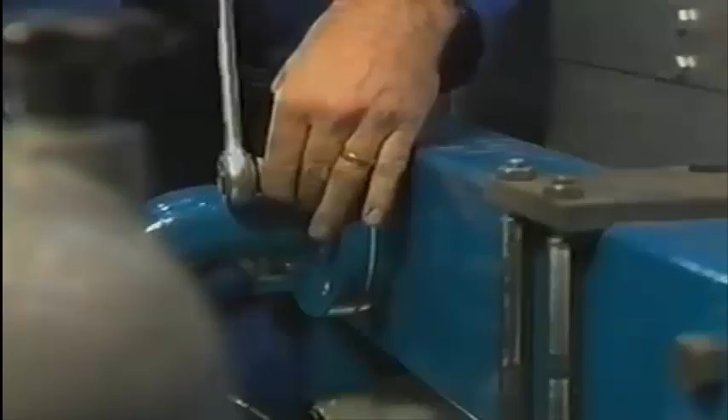Start by dismantling the cooling water discharge pipe before removing the cylinder head cover. This is in order to prevent a mixture of the draining water with lubricating oil. Subsequently, remove the cylinder head cover.

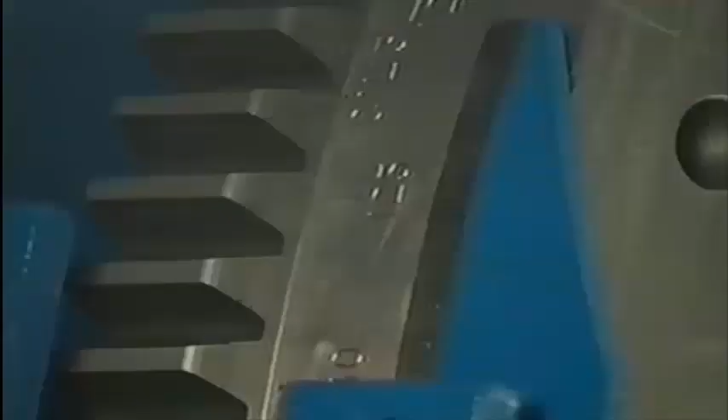Turn the cylinder in question in top dead center combustion and check if the push rods are loose. Disconnect the plug of the exhaust valve temperature monitoring system. Now carefully remove the thermocouple of the exhaust temperature system. Take care not to distort the thermocouple while pulling it out.

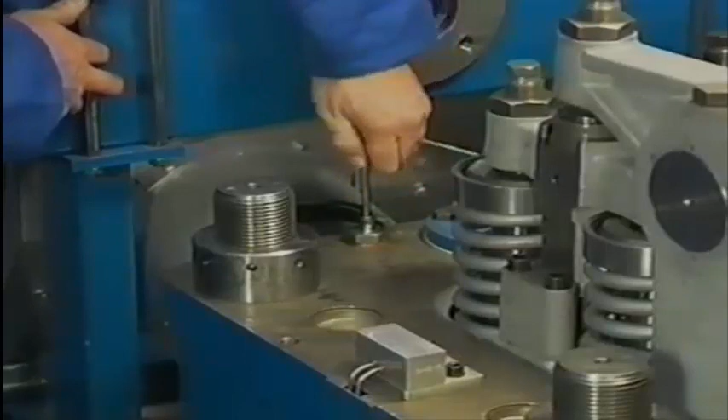In order to remove the upper half of the clamping ring of the exhaust gas piping, 4 socket head screws have to be loosened and removed. Next to the connection of the exhaust piping, the inlet air bend is located. Here, only 4 bolts have to be removed. We continue with dismantling at the operating side of the engine.

Begin with removing the high-pressure fuel line. First, remove the fuel drain pipe of the high-pressure fuel line. After that, unscrew the union nuts from the pump and the injector.

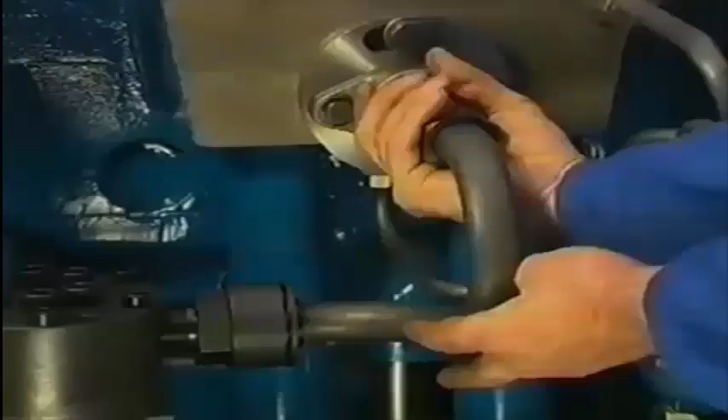Now remove the remaining pipes to and from the cylinder head. First, the fuel leakage pipe. Second, the main lube oil supply pipe. And third, the pilot air pipe. Immediately after removal of these pipes, all openings should be covered.

Before placing the hydraulic stretching tools, make sure that the screw thread of the cylinder head studs are undamaged and clean. Connect the hydraulic stretching tools with the pump by means of the high-pressure hoses. Only 2 jacks are connected because the other 2 jacks are linked up. After connecting the hoses, check if the jacks are in bottom position. Then, the jacks are turned back 1 turn.

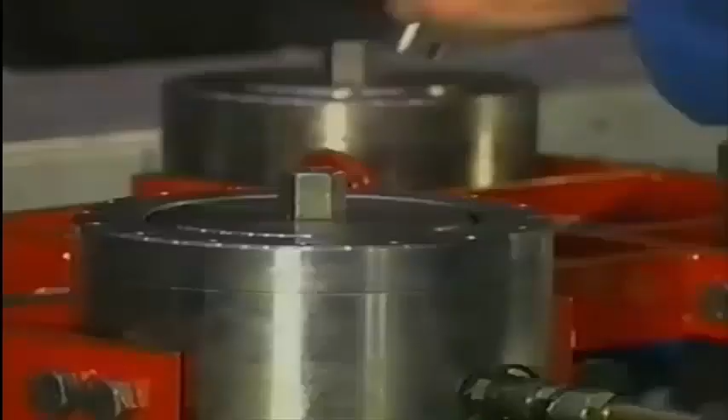Close the return valve on the pump. Set the prescribed hydraulic pressure as specified in the instruction manual by means of the reducing valve. The read-off value on the air pressure gauge indicates 10% more pressure than the real value read off on the oil pressure gauge. This has been done for safety reasons.

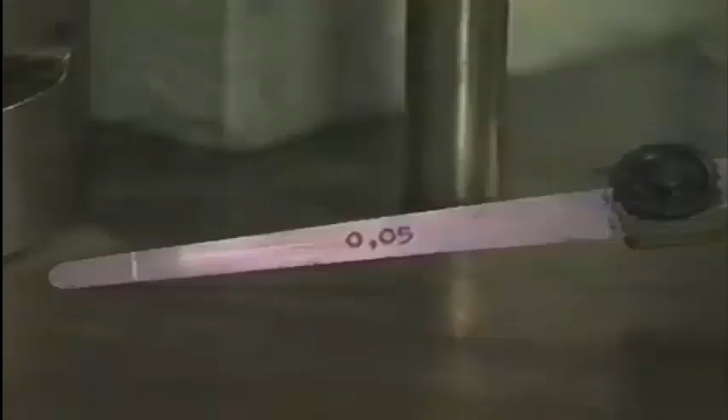Start the hydraulic pump by opening the air supply valve. At the same time, check at what pressure the nuts come loose. Turn back the nuts with a special pin and lower the hydraulic pressure. In case it is not possible to turn the nuts when the prescribed pressure has been reached, one needs to check with a feeler gauge if the nut is free from the surface. Disconnect the hoses, remove the jacks from the studs and check if the nuts are loose.

In order to prevent damaging of the removed cylinder head nuts, it is recommended to turn them on the studs of the nearest cylinder head. Subsequently, place the special lifting tool. For this purpose, 3 M16 threaded holes are provided in the cylinder head. Lift the cylinder head a bit so that the possible leaking water will flow to the outside of the cylinder liner.

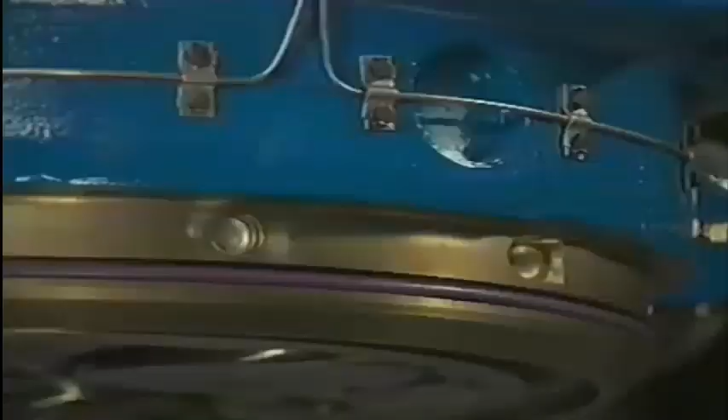Pull the push rod protecting pipes out of the cylinder head, in case they stick inside. Check if the starting air connecting pipe stays in its place. Hold both the push rods until the cylinder head has been completely removed. This is in order to avoid possible damage. Take away the O-ring and place the distance ring. This protecting ring prevents the gas sealing face from damaging when the cylinder head is placed directly on the floor.

Remove both the push rods and the protecting pipes. Close the openings in the engine block to prevent dirt entering the camshaft space. Finally, remove the gas sealing ring and cover the cylinder liner.

These are the special tools required for disassembly and assembly of the piston with connecting rod. All these tools come standard with the engine. To prevent carbon build-up on the piston crown, the cylinder liner accommodates an anti-polishing ring. Remove this ring before pulling out the piston. To do so, use a tripod extractor which can be fitted in 3 special grooves of the anti-polishing ring.

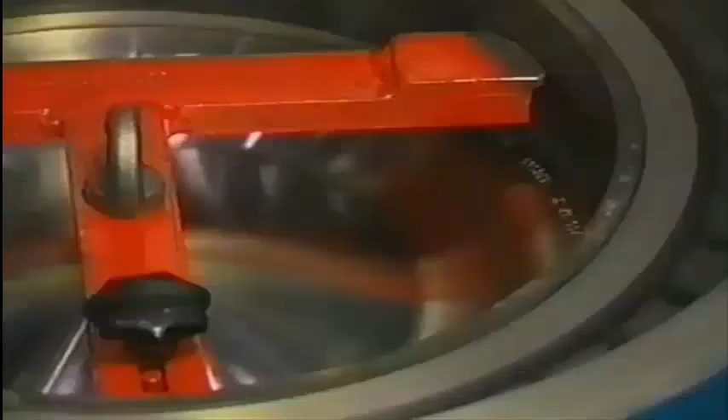First, try to tap the ring out of the liner using a plastic hammer. If the ring is stuck, it can be pressed out gently by turning the piston to the top dead center. When the piston is in the top dead center, the ring can be removed from the liner. Tap the 2 M16 threaded holes so that the lifting tool can be fitted. The cylinder liner must be free from carbon to protect the piston rings during removal of the piston.

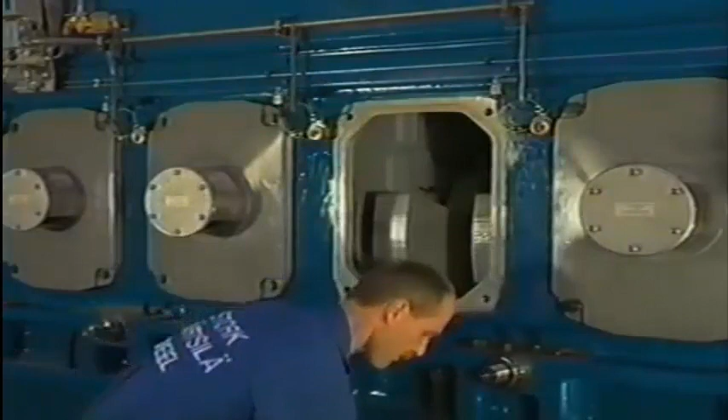When the lifting tool has been provided, the piston can be turned to the bottom dead centre. Remove on both sides of the engine the crankcase doors. Fit the jacks on either side of the connecting rod foot when the piston has reached the bottom dead centre.

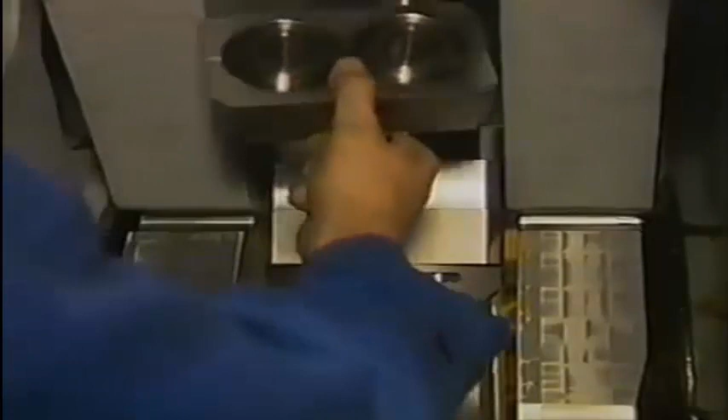To allow all 4 studs to be stretched simultaneously, 3 superposed jacking elements, so-called triple jacks, are used, which jointly provide the required tensile force. Note, the distance piece is provided with a pin groove at the front. Two nuts are used to secure the 3 triple jacks. Each jacking element comes with a separate coupling for oil supply hoses.

When the hoses have been connected to the pneumatic pump, tighten the nuts with the hook spanner to prevent the jacks reaching their maximum stroke. Loosen the pulling pieces 3/4 of a turn using an Allen key to prevent the connecting rod nuts from getting stuck when they are loosened. Loosen the knurled jack nuts 3/4 of a turn from the bottom position.

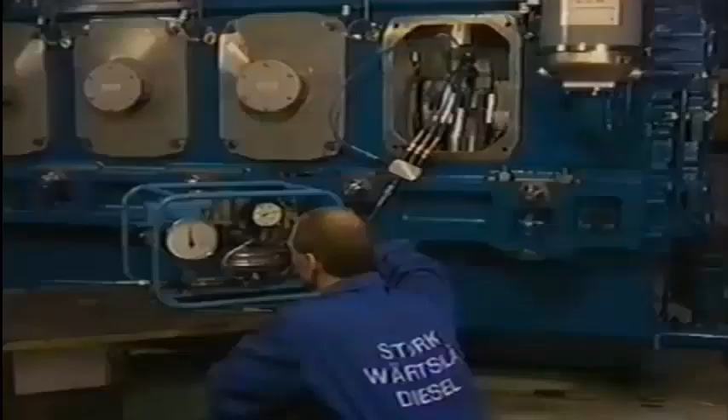Now gradually pressurize the jacks using the pneumatic pump. When doing so, check the moment at which the nuts come loose and then slack off the nut as specified. Slowly open the return valve of the pump to release the pressure in the jacks. Check that the nuts stay loose. Remove the jacks and the connecting rod nuts.

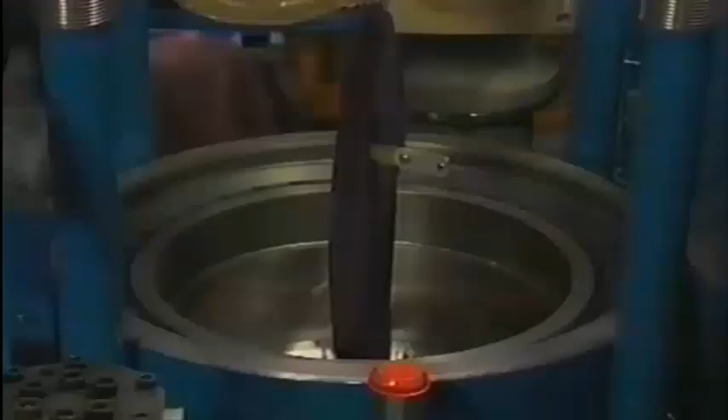The piston with connecting rod can now be lifted from the bearing caps. Fit a plastic protecting plate to the bottom of the connecting rod foot to prevent the cylinder liner from being damaged, and do this before the end penetrates the cylinder liner. Now the piston with connecting rod can be lifted out of the cylinder liner.

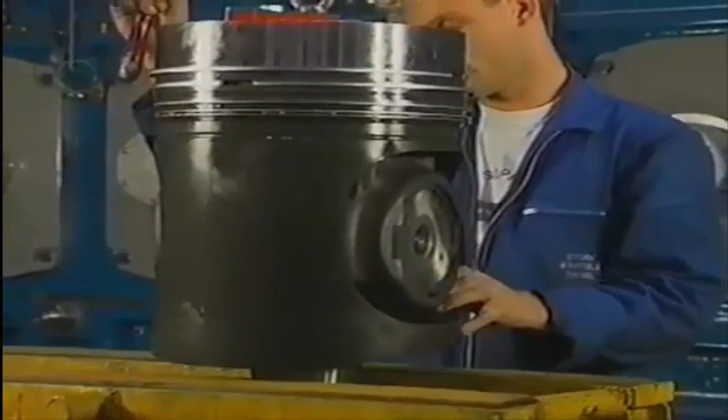Place the piston on a piston pedestal, with the piston pressure side supported on a flat wooden base. Finally, remove the intermediate plate from the big end bearing block. Seal the lube oil supply ducts in the bearing block and secure fixing tools to the bearing caps if turning is required.

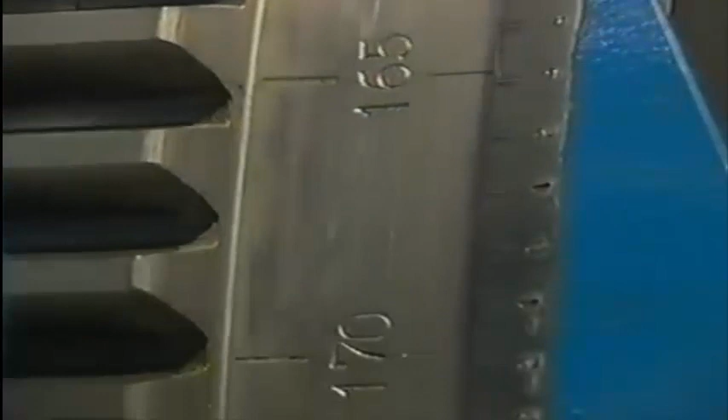Here's a look at the necessary special tools needed for dismantling and mounting the big end bearing caps. All of these tools are delivered standard with the engine. Turn the crank of the particular cylinder in bottom dead center position. This is the best position to place hydraulic jacks. Now turn the bearing cap upside down until the stud bolt nuts point vertically upwards.

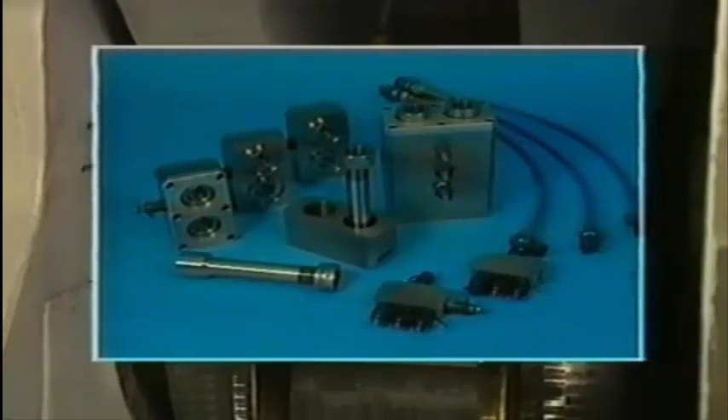Then place both the jacks on the stud bolts at the same time, so that the weight of the jacks is divided uniformly and the caps remain in balance. Since all 4 of the stud bolts have to be stretched simultaneously, 3 jack elements are used, so that together they deliver the tensile force needed. Note, this distance piece is provided with the pin groove at the side.

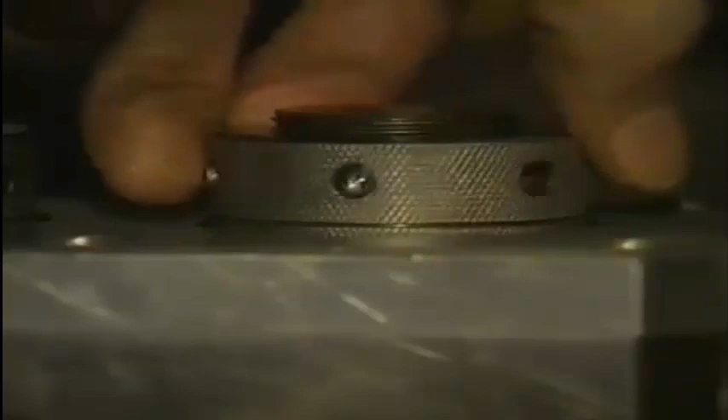Every jack element has a separate coupling for oil supply. As soon as the jacks are connected to the hydraulic pump, the nuts of the jacks are turned tight with a hook spanner. This is in order to prevent the jack reaching its maximum stroke. Then turn back the 4 nuts half a turn. Bring the jacks under the right pressure with the pneumatic pump.

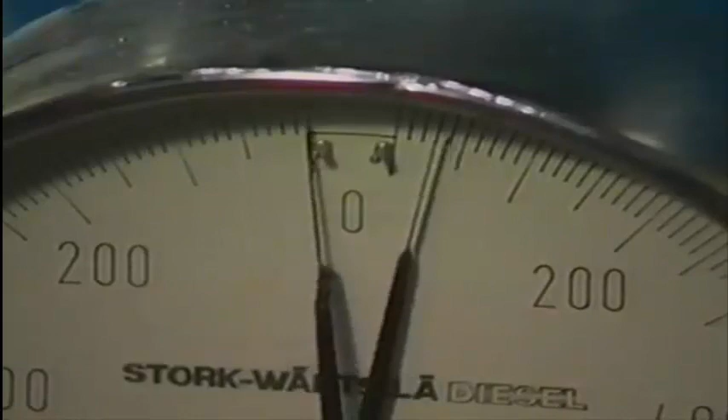Check at which pressure the nuts come loose and turn back the nuts sufficiently. Subsequently lower the pressure to 50 bar and check if the nuts are free. When they are, release the pressure completely. Remove the jacks and turn the relevant crank in top dead center position. When turning, be sure that the bolts of the bearing block point downward to prevent them from getting stuck in the engine block.

To place the slide, the bearing block has to rotate 90 degrees around the shaft so that the nuts from the lower bearing cap point to the exhaust side of the engine. Subsequently fix the slide to the purpose-fitted supports on both sides of the engine block. The supports take care of the positioning and securing of the slide. Now turn the crank carefully 60 degrees through top dead center towards the exhaust side. Place at camshaft side the carrier under the upper bearing cap.

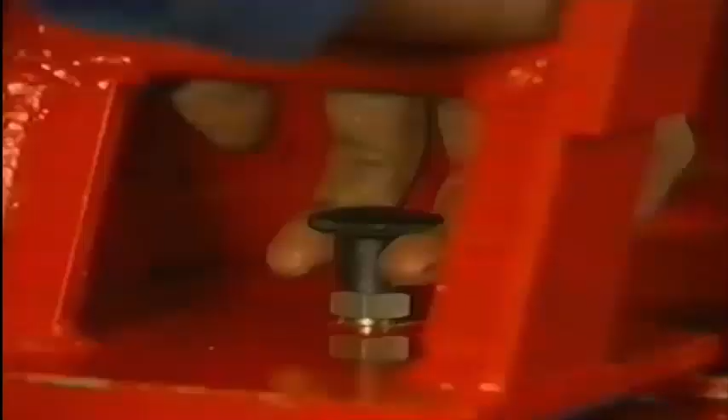Connect it with the 2 nuts to the bearing cap. Now first remove at exhaust side the 2 lower nuts of the bearing cap in such a way that the second carrier can be mounted. Pull up the blocking pin when the carriers are moved inside.

Fasten the carrier of the lower bearing cap by turning on the blocking pin in the locating hole at one side of the cap. During mounting of these carriers, it is possible and sometimes necessary to turn the crankshaft a little bit. Always do this with the manual control of the turning gear device.

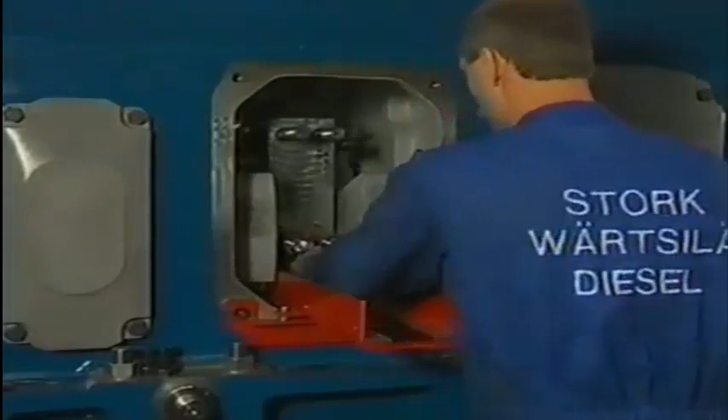When also the upper nuts have been removed, both the bearing caps can be pulled out. The bearing shells can be removed from the bearing caps by hand. Wrap up the shaft with a piece of rubber for protection and closing of the lubrication oil channels in the crankshaft.

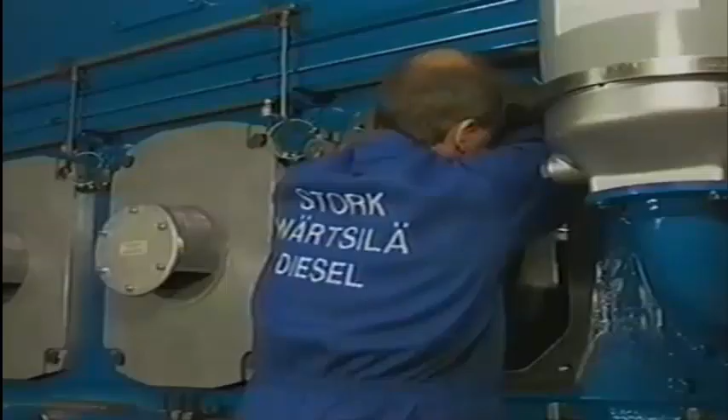The crank pin bearings can also be inspected without removing the cylinder head and the piston. The piston will be blocked then by means of 2 supports. These are the aluminium supports with matching fastening bolts. They are both placed through the crankcase door and mounted at the bottom side of the cylinder liner with the delivered bolts. To do so, the piston has to be placed in top position.

Subsequently, remove the already loosened nuts of the connecting rod foot. After that, turn the crank to the bottom dead center position. Now the piston with connecting rod will rest on both supports and the bearing caps will come free from the connecting rod foot. When the crank is in bottom dead center, the big end bearing caps can be dismantled in accordance with the preceding procedure. Mounting has to be done in reversed order.

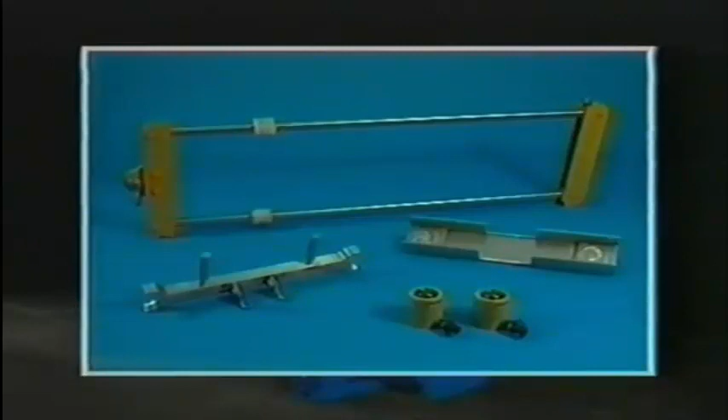Here are shown the special tools needed for the cylinder liner: lifting gear, positioning clip, bridge piece and jacks. These tools come standard with the engine. Before the cylinder liner can be removed, 3 temperature sensors must be taken out from the liner. Be sure not to bend the sensor when taking it out.

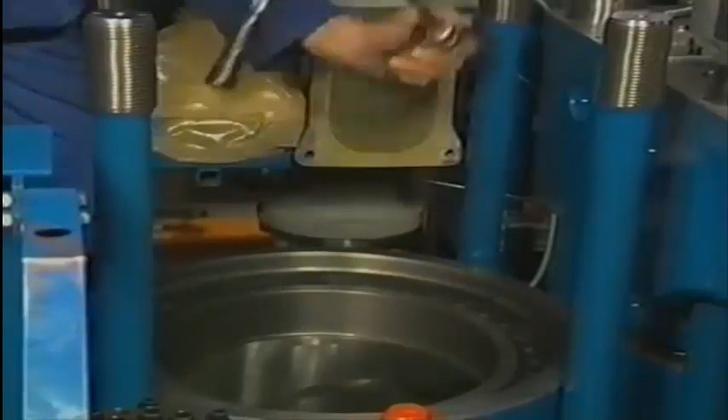Now remove the 2 cylinder liner clamp pieces which prevent the liner from being lifted when the cylinder head or piston is being removed. Now place the hoisting tool in the cylinder liner in transverse direction of the engine. Make sure that the tool is perfectly centered in the liner.

To detach the cylinder liner from the joint faces, loosen it with 2 jacks. Turn the crank of the relevant cylinder to the bottom position so that the counterweights are located straight under the cylinder liner. The bridge piece and jacks are placed on top of both counterweights.

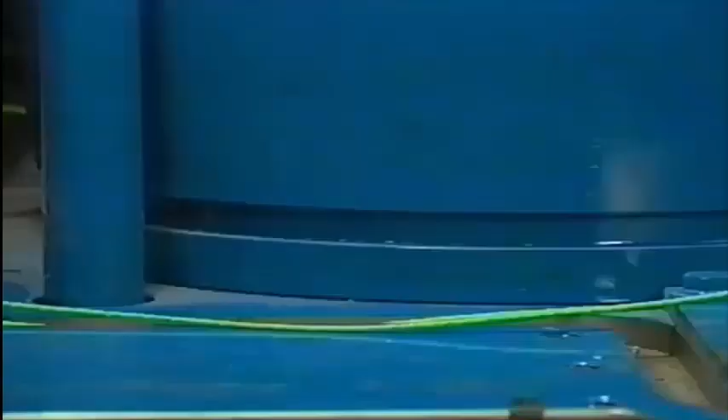Connect the jacks to the hydraulic pump and pressurize the jacks to push the liner out. Gradually increase the hydraulic pressure by turning down the air pressure reducing valve on the pump. When the liner is loose from the sealing surface, it can be lifted out of the engine.

Now clean the sealing face of the cylinder liner well and check it for any damage. If necessary, the sealing face can be slightly lapped with a lapping ring. Finally, remove both O-rings from the cylinder liner and clean the grooves if necessary.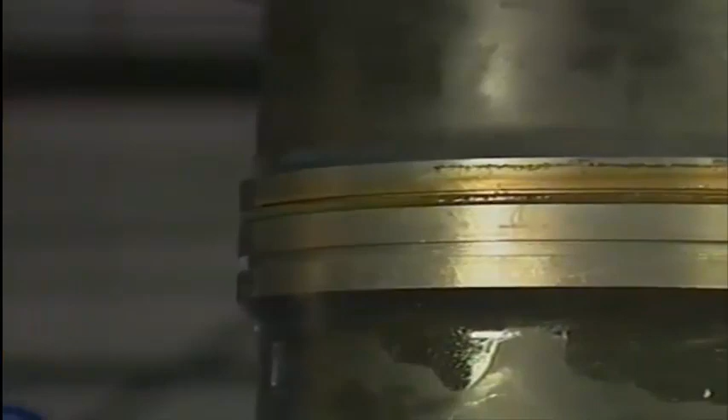This is a look at the tools required for disassembly and assembly of the main bearing. All these tools come standard with the engine. Never remove 2 main bearings mounted side by side at the same time. First, loosen both side studs. Standard, 1 jack for this purpose is available. If 2 jacks are delivered, then simultaneously mount the jacks on both side studs of the relevant main bearing.

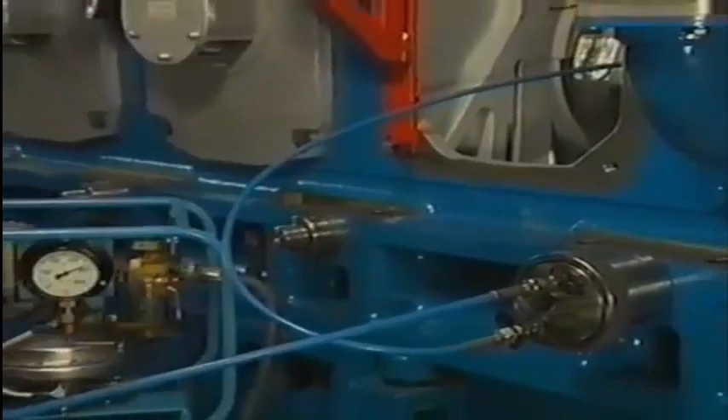Connect the hydraulic hoses and then first tighten the jack as far as possible. Then slack off the jack 1 full turn. The jacks are so designed that they can be connected in series. Set the prescribed hydraulic pressure using the air pressure reducing valve on the pump and pressurize the jacks as required simultaneously. Note down at which pressure the nuts come loose. The prescribed procedure is stated in the instruction manual. Remove the nuts on either side.

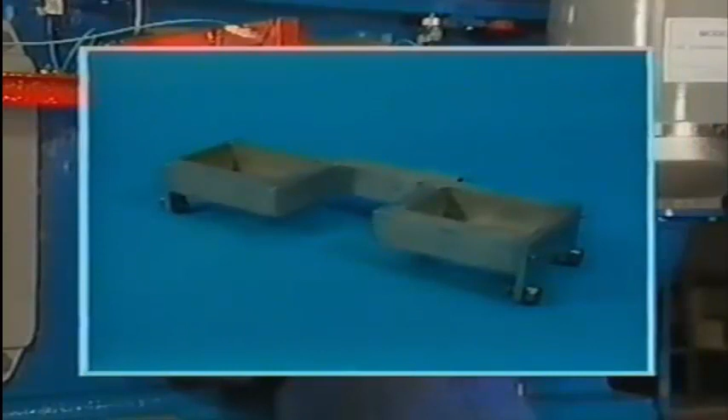The engine is equipped with a bearing monitoring device. A sensor is fitted on each main bearing cap. The sensor can be detached by disconnecting the banjo union. This must be done before the main bearing cap is loosened by jacking. A trolley placed on the rails in the oil sump is used to position the jacks of the main bearing cap under the studs.

Place the long stroke jack in the trolley with the rotary disc pointing upwards. Now the main bearing jack can be placed on the rotary disc using the jack hoist mounted at the side of the engine block.

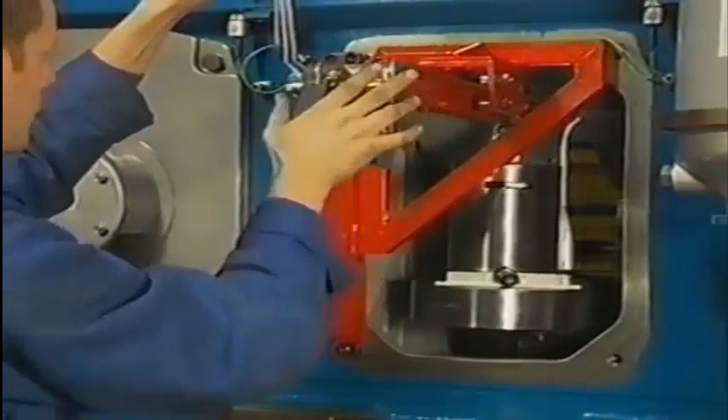In this way, the jack can be easily moved until it is straight under the stud of the main bearing cap. Then couple the long stroke jack to a hand pump to lift up the main bearing jack. This is done to allow the jack to be screwed on the stud thread in an easy way.

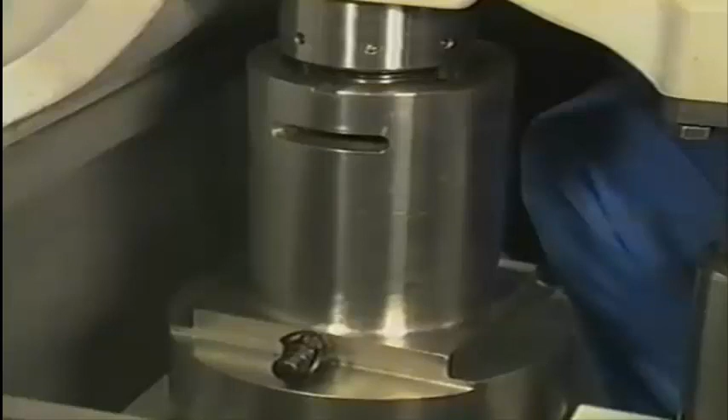Now turn up the jack until it contacts the main bearing cap. Repeat this procedure for the second jack. Loosen off the jacks one turn. Connect the jacks to the pneumatic pump.

Pressurize both jacks as specified in the instruction manual and simultaneously check when the nuts come loose. Slack off the nuts of the main bearing studs one full turn. When the nuts are loose, the long stroke jack is raised to take up the main bearing jack when it becomes free from the stud.

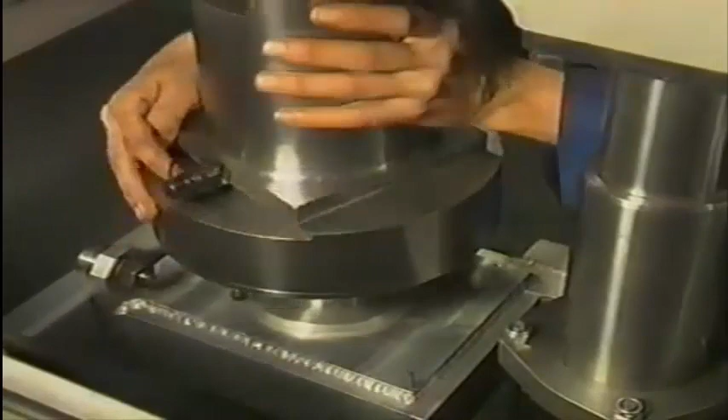Now drop the oil pressure, which makes the jack go down as well and can be lifted from the crankcase using the jack hoist.

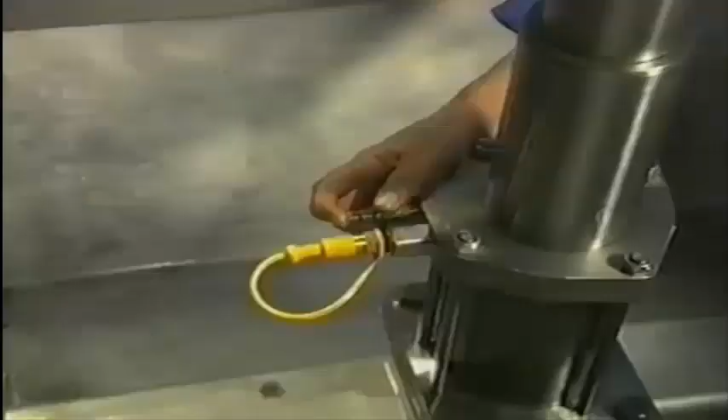Mount the hydraulic couplings on the low-pressure telescopic jack under the main bearing cap, which also serves as the main lube oil supply line when the engine is in operation. There are two connections on the telescopic jack which are marked up and down.

Connect the delivery side of the hand pump to the down connection, black hose, and the oil discharge hose, blue, to the up connection. Keep the valve in the return oil line closed. Pressurize the telescopic jack slightly so that first both side studs can be removed.

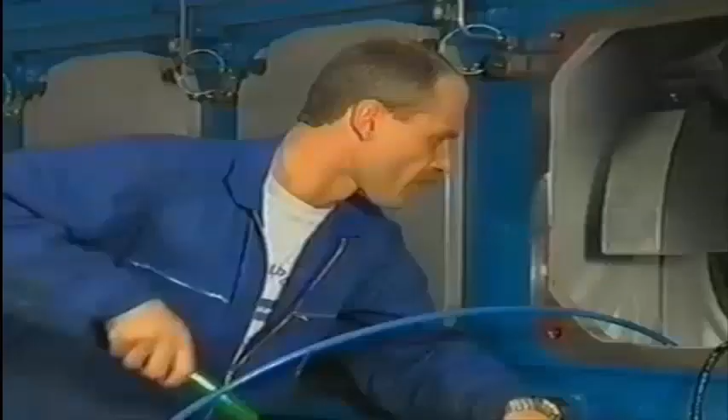Now remove the two main bearing cap nuts. Keep the return valve on the pump closed. Next, the return valve on the pump can be opened, after which the bearing cap can be forced down in a controlled manner.

When the telescopic jack has reached its second stage, the cap will be lowered by its own weight. When the cap is in its bottommost position, the lower bearing shell can be taken out manually. Disassemble the upper bearing shell using a turning plate. This plate is placed in the lube oil duct of the crankshaft and secured with an Allen key.

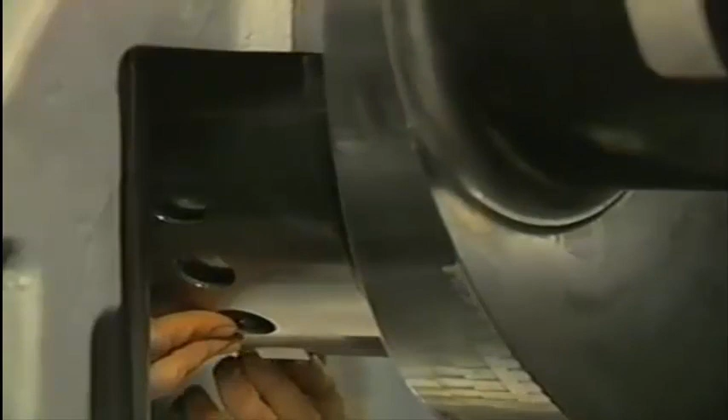Gently turn the crankshaft so that the upper bearing shell is pushed out of the crankshaft bore. To prevent damage, collect the bearing shell when the whole shell has been pressed out of the bore.

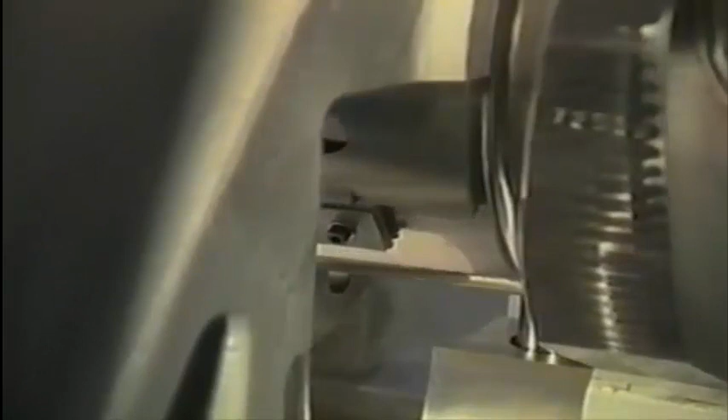Before the installation of the main bearing is started, the shaft journal must have been checked for any damage and cleaned. When the upper bearing shell is mounted, the running face must be lubricated with clean engine lube oil. The backside of the bearing shell must be clean and dry.

Position the upper bearing shell in longitudinal direction of the engine using a positioning lip local to the lube oil duct. Make sure that the numbers of the bearing point towards the driving end of the engine. Try to push the bearing shell as far as possible by hand. Now the bearing shell can be turned in place using the turning plate.

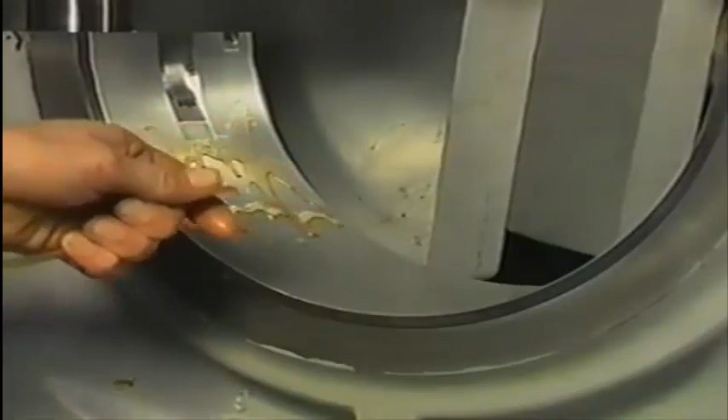Use the manual device of the turning gear to divide the bearing on either side. Remove the turning plate and clean the main bearing cap well. Now place the lower bearing shell in the main bearing cap and make sure that the backside is clean and dry. Make sure that the bearing positioning lip falls into the main bearing cap recess. The lower bearing can then be fitted in one position only.

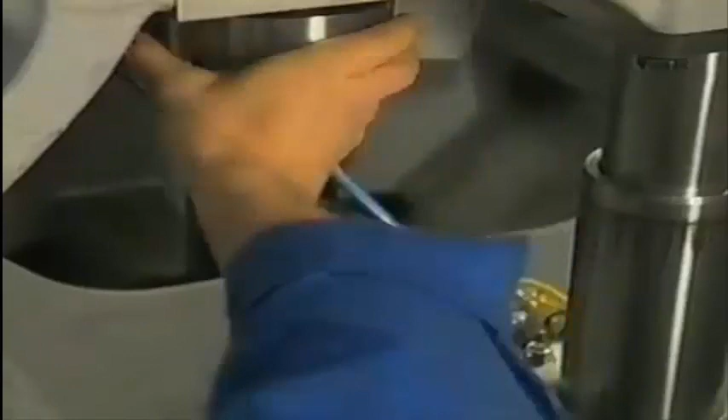Equalize the bearing joint faces with the joint faces of the main bearing cap and apply a layer of clean engine oil to the running face of the lower shell. Exchange the connections on the telescopic jack so that the main bearing cap can be jacked up. Now the oil delivery hose is linked to the up connection and the oil return hose to the down connection.

Now lift the bearing block using the special hand pump. This pump has an internal protection device limiting the pump pressure to 150 bar to protect the telescopic jack. When the bearing block is pressed against the joint faces, the nuts can be fitted. Hand tighten the nuts using the special pin.

After the nuts have been fitted, the telescopic jack can be disconnected from the hand pump. Place new O-rings on both side studs and lubricate the O-rings with the prescribed grease.

Now screw both studs into the bearing cap. Now slack off the stud a quarter of a turn. First, provide the stud with a nut on engine exhaust side only, because this stud is pre-tensioned first. This is done to align the bore of the main bearing.

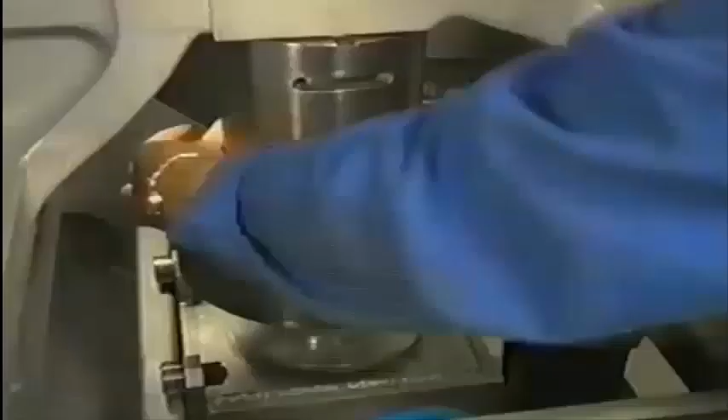Now the main bearing cap studs can be tightened. To do so, provide the jacks as explained earlier for the disassembly procedure. During assembly, the jack need not be turned back. It can be connected directly to the pump. Now the jacks can be pressurized as required.

Count the number of holes when turning the nuts. The number of turns must be approximately the same for all nuts. Now depressurize. Repressurize the jacks again and try to turn the nut further.

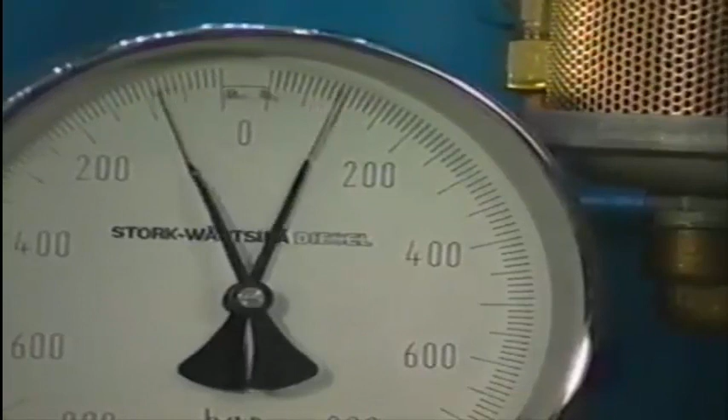Finally, check for a third time to make sure the nuts do not turn any further. Now remove the complete set of hydraulic tools from the crankcase.

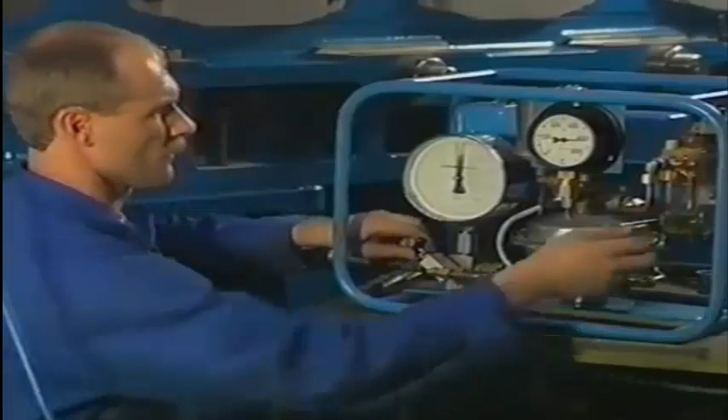To prevent stress in the exhaust side stud, it must first be loosened. After the stud has been loosened, the exhaust side stud can be pressurized as required and the nut can be tightened. When this is done 3 times, then the stud at operating side can be tightened as well. The complete hydraulic tightening procedure is shown at operating side.

Next, pressurize the stud at operating side as required and tighten the nut. Allow the pressure to drop. Then retighten the jack as far as possible. Now fully pressurize the jack once again and retighten the screw as far as possible.

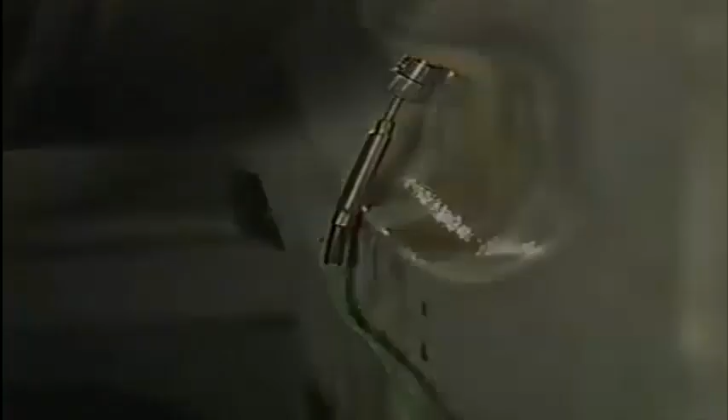After the pressure is dropped, it can be raised again immediately. When the jack is pressurized for the 3rd time, the nut is not allowed to turn any further. Finally, mount the thermocouple and check the bearing clearance, and make sure no loose items are left behind in the engine.

To prepare the cylinder liner for assembly, the sealing face must be clean and undamaged. After cleaning the O-ring grooves, always fit new O-rings to seal the engine cooling water space. Lubricate the O-rings with the prescribed grease to keep them in good condition.

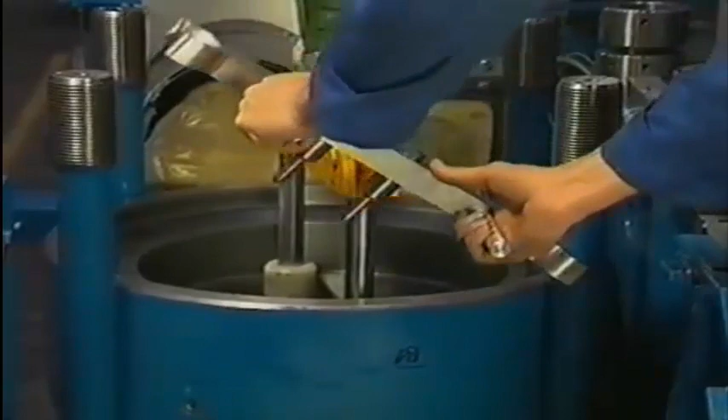Properly clean the sealing edge on the engine block and check this surface for damage. If necessary, the edge can be slightly lapped using a special lapping ring. Also remove dirt or corrosion from the central bore using abrasive paper and check for any damage. At the very least, cover the lube oil ducts in the big end bearing cap during this cleaning job. It is recommended, however, to cover the complete bearing block.

Now the liner can be installed. Lubricate the liner edge with the prescribed Loctite for joint face sealing. Since the liner edge is lubricated, any dirt trapped on the sealing edge of the cylinder block can easily be removed, because this edge is a dry surface. Lower the cylinder liner slowly into the engine block.

Fit the positioning tools before the liner falls into its bottommost guide rim. Place the positioning tools between the two frontmost cylinder head studs. The two positioning pins then fall into two cooling water channels of the cylinder liner.

Make sure that the mark M above the frontmost sensor hole is 39 degrees out of the center and that it points in the direction of the fuel pump. This position is also marked on the positioning tools. Guide the tools by hand when lowering the cylinder liner.

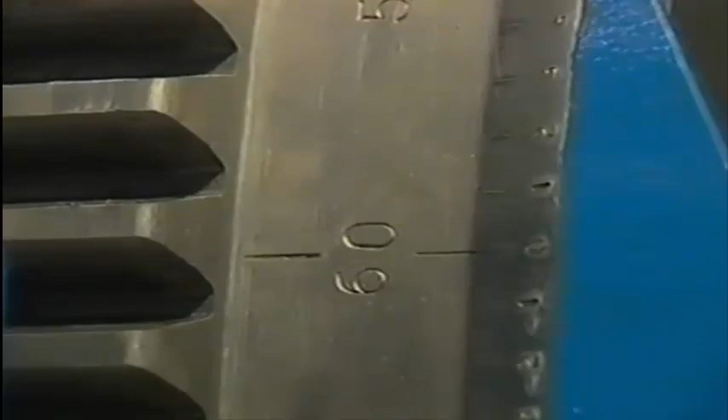Finally, proceed as follows. Remove the tools. Fit both clamp pieces and thermocouples. Close the liner with a cover if the piston is not mounted immediately.

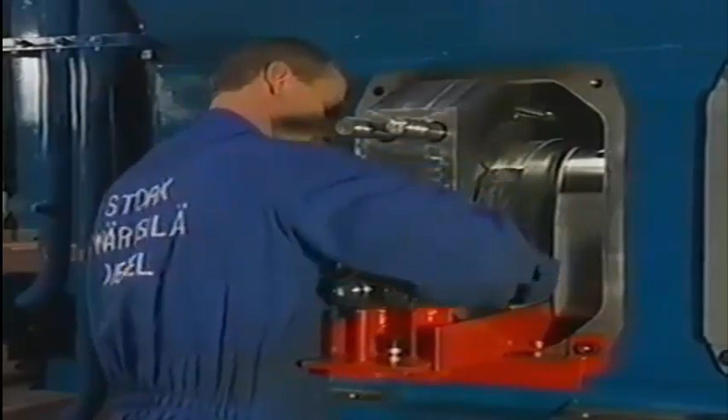Place, if necessary, the slide and turn the crank 60 degrees through top dead center toward the exhaust side. Use the manual control of the turning gear device to bring the crankshaft into the correct position. Remove the piece of rubber from the crank pin. Check the shaft for damage. Clean the shaft thoroughly and check if the lubrication oil canals are clean.

Start with mounting the upper bearing shell. This is the shell without the lubricating oil supply groove. Oil the bearing surface with clean engine lubricating oil. The back surface needs to be clean and oil-free.

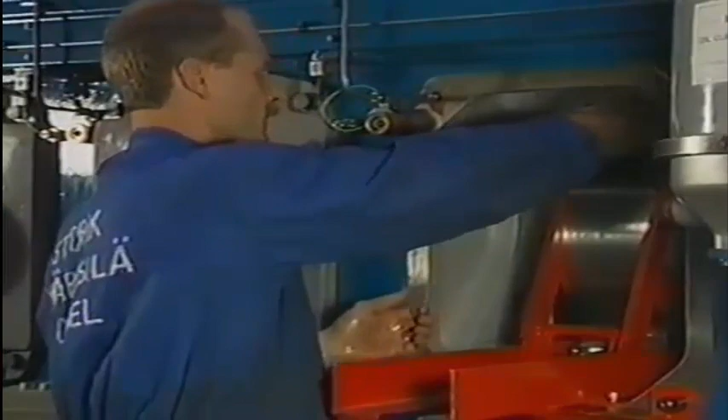Before the bearing shell is mounted, the bore and joint faces of the cap must be checked for damage. Make sure that the positioning lip of the bearing fits into the appropriate recess in the cap. Then divide the shell proportionally over the joint faces of the cap. Move the upper bearing cap against the shaft.

Then oil the lower bearing shell. This one can be recognized by the uninterrupted lubricating oil groove. Repeat the preceding procedure.

Check, before both caps are moved against each other, if the positions of the dowel pins from the joint faces are correct. The bearing caps are marked with camshaft side. Now apply the upper two nuts. Turn them by hand as far as possible with a special pin. Subsequently, remove both carriers and apply the two remaining nuts.

Turn the crank in top position and remove the slide. To pump the bearing caps tight, the crank should be turned into bottom dead center position. While doing this, guide the bearing block to prevent getting it stuck in the engine. Place the hydraulic tools again proportionally on both sides.

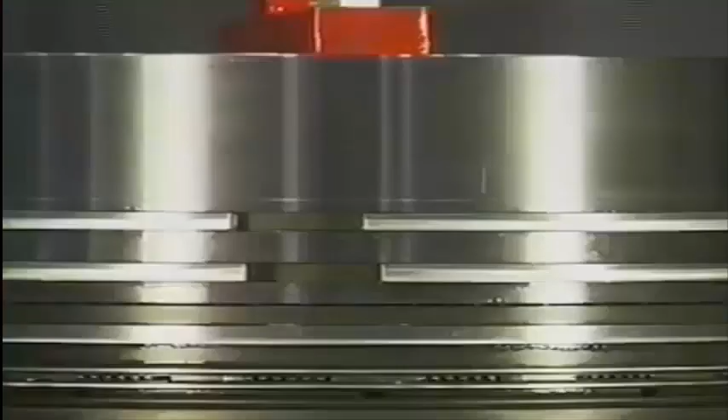After connecting the hydraulic hoses, turn the knurled jack nuts down. Subsequently, bring the jacks simultaneously to full pressure. Tighten the nuts with a special pin and check if all 4 nuts have the same displacement. Release the hydraulic pressure on the jacks until 0. Completely tighten the knurled nuts of the jacks again.

Bring the prescribed pressure to the jacks for the second time and tighten the nuts further if possible. Repeat the procedure once again. When the jacks are brought under pressure for the 3rd time, the nuts should not turn any further. Check the oil clearance of the bearing with feeler gauges.

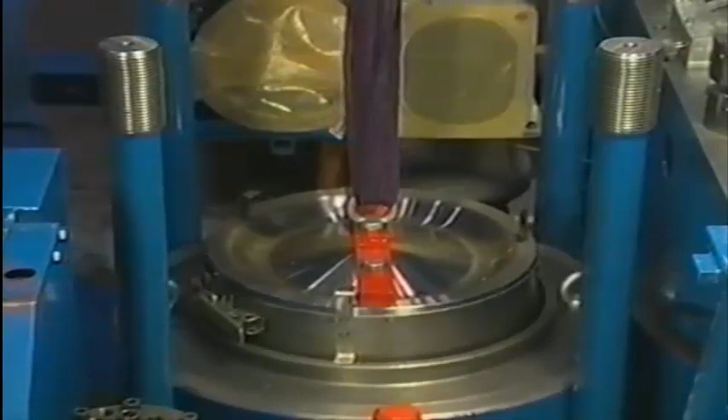Turn the crank of the relevant cylinder to the bottom dead centre and clean the cylinder liner before the piston is installed. Provide the guide ring on the top side of the cylinder liner to guide the piston rings into the liner. Divide the gaps of the piston rings above the gudgeon pin at an angle of 180 degrees in relation to each other. Apply a proper layer of clean engine oil to the piston rings so that the piston can be mounted smoothly in the liner.

Fit the clamp around the piston crown. The piston rings are already forced into their grooves when the clamp is closed. On one side, the connecting rod is marked camshaft side. This marking corresponds with the marked position on the big end bearing block. Carefully lower the piston into the liner with the marking camshaft side pointing towards the camshaft side. Now apply a layer of clean lube oil to the piston skirt.

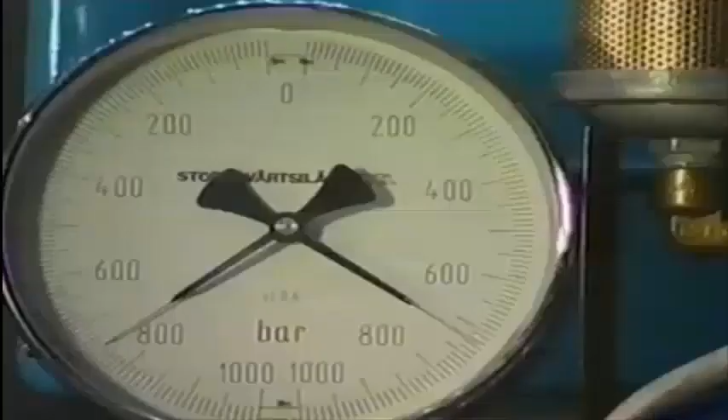Fit the intermediate plate to the connecting big end bearing caps. Make sure that the plate is clean and undamaged when it is fitted. Next, continue lowering the piston. Check that the piston rings slide smoothly into the liner. When the connecting rod has been lowered far enough, remove the plastic protection plate from the connecting rod foot. Check that the connecting rod foot is clean and guide it carefully over the studs.

Disconnect the crane and remove the lifting tool, clamp and guide ring. Now provide the jacks on either side of the connecting rod foot. After the jacks have been connected to the pump, retighten the nuts of the jacks with the hook spanner to bring the jacks in bottommost position.

Connect the second set of jacks using an oil distributing block and subsequently fully pressurize the jacks simultaneously. When this pressure has been reached, the nuts can be tightened with a special pin. Check the displacement by counting the number of holes, which must be the same for all nuts. Then, slowly drop the pressure by opening the return valve.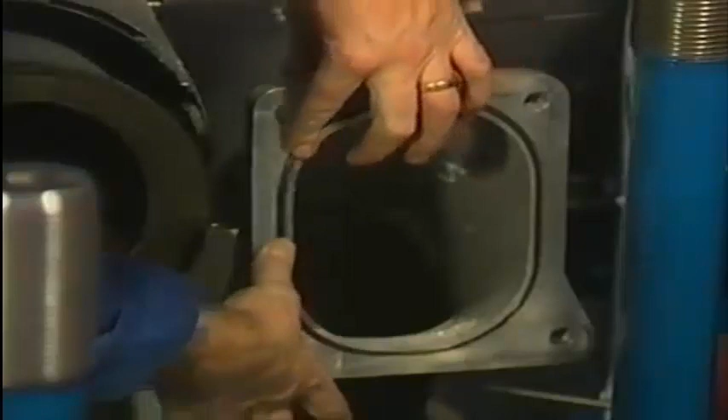When the jacks are completely pressureless, tighten the jack nuts as far as possible and fully pressurize the jacks for the second time. Next, tighten the connecting rod nuts further, if possible. Depressurize and immediately afterwards pressurize the jacks for the third time for verification. This time the nuts should not turn any further. Now remove the hydraulic tools.

Remove the carbon deposits on the inside and outside of the anti-polishing ring and place the ring in the liner using the tripod.

When mounting a cylinder head, always use a new steel gas sealing ring. The gas sealing faces of both the cylinder liner and the cylinder head must be in good condition. Otherwise, lap them slightly with a lapping ring. Clean the pushrod sealing rings thoroughly and grease them with the required silicone grease, which keeps the rubber in good condition. Subsequently, place the pushrod protecting pipes. Check the pushrods for damage and mount them with the venting hole pointing upwards.

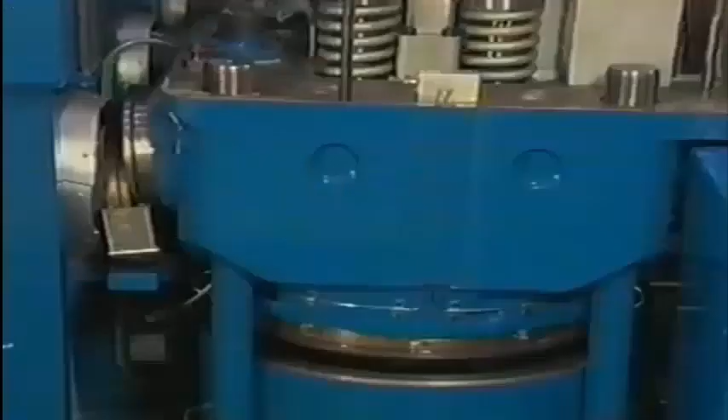Fit a new rubber sealing ring on the flange of the inlet air bend and grease it with the prescribed lubricant. Also on the connection pipe for the starting air, a new sealing ring is fitted and greased with the prescribed lubricant. Now the new cooling water sealing ring around the cylinder head is fitted and greased.

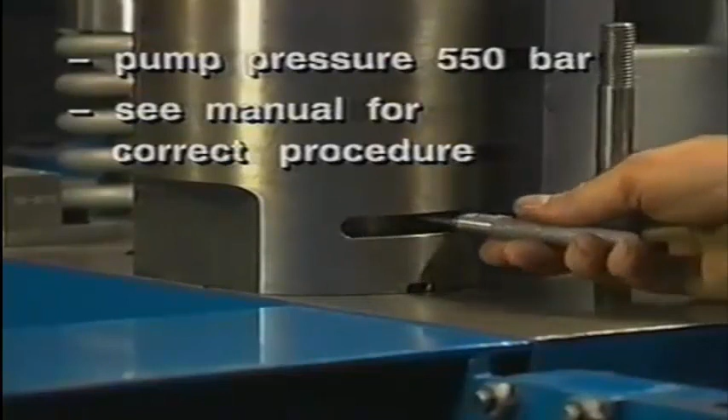Finally, both the rubber sealing rings of the push rods in the cylinder head are being renewed and greased. Turn the cylinder in combustion top position so that the inlet and the exhaust push rods are placed on the base circles of the cams. Now cautiously lower down the cylinder head over the cylinder head stud bolts and guide both push rods down through the passages in the cylinder head.

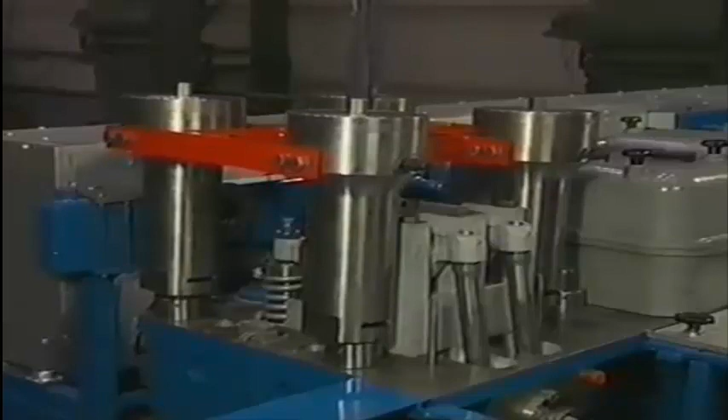The push rod protecting pipes need to be guided as well until they fit properly in the cylinder head. Make sure that the cylinder head will also slide easily over the starting air connection pipe. By the oblique position of the inlet and exhaust flanges, the cylinder head automatically takes its position. Make sure that the exhaust flange on the cylinder head fits in the lower clamping piece. Clean the surface of the cylinder head and the nuts thoroughly and check for damage before the nuts are being applied.

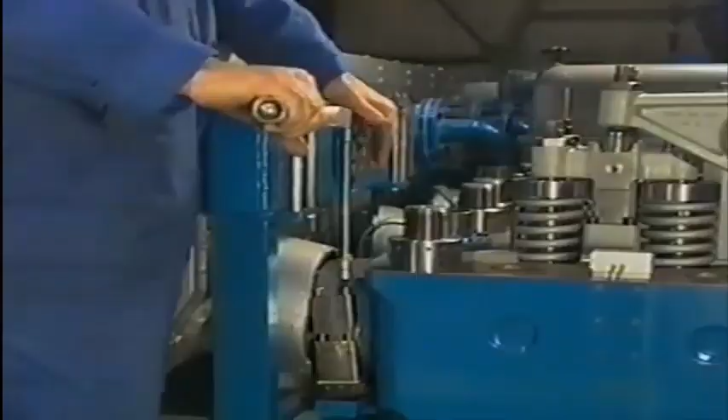Fit the hydraulic stretching tools again. Then tighten the jacks completely and connect the hoses. The return valve on the pump should be opened. After that, it is necessary to check if the jacks can be turned any further. This is to be absolutely sure that the jacks are in bottom position and that there is a maximum stroke available. Bring simultaneously the jacks under pressure as prescribed in the engine instruction manual. Tighten the nuts completely and check the nut displacement by counting the number of holes that should be the same for every nut.

Fully release the pressure and turn down the jacks as far as possible. After that, bring the jacks for the second time under full pressure. Try to turn the nut farther. Repeat this procedure as a checkup. Make sure the nuts do not turn any farther. After that, remove the stretching tools.

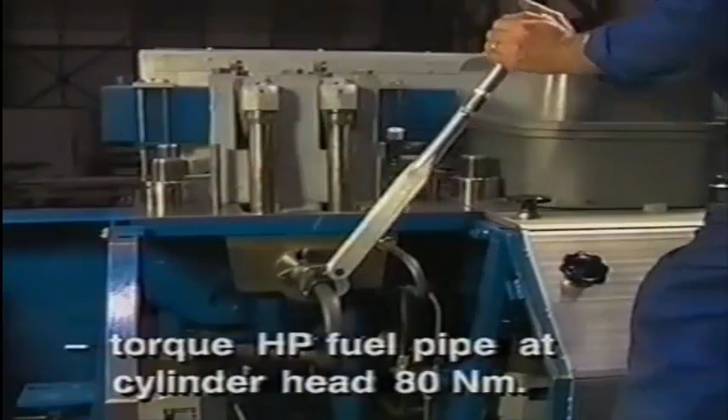You can start, for example, with mounting at the exhaust side. For this purpose, grease first the inside of the upper exhaust clamping ring with a heat-resistant lubricant. Subsequently, place the clamping ring over the exhaust flange and mount it with the 4 socket head screws. Treat the screw thread of these bolts also with a heat-resistant lubricant as specified in the instruction manual. Then, these socket head screws are tightened to a specific torque. This torque wrench is a standard delivered tool with the engine.

Use a new gasket when the cooling water discharge pipe is mounted. The bolts of the rubber clamping piece are also tightened to a specific torque. Successively, the pilot starting air pipe, lubrication oil supply pipe, and the central drain pipe can be mounted at operating side. Remove the protecting cap of the fuel pressure insert in order to mount the high-pressure fuel line. First, tighten the union nut of the high-pressure fuel line in the connection to the fuel pump, and after that, the union nut on the insert.

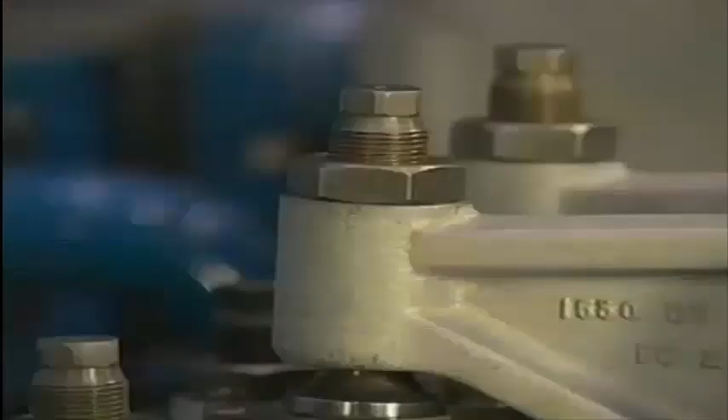Both union nuts of the high-pressure fuel line are tightened to a specific torque. First, tighten the union nut on the fuel pump. After that, the union nut of the insert from the cylinder head. Subsequently, the fuel drain pipe is connected. Finally, the sealing flange on the cylinder head is tightened. Check if, at operating side of the cylinder head, no parts or tools are left behind. After that, the panels of the hotbox can be mounted.

Subsequently, the valve clearance has to be adjusted. However, for this purpose, the yoke has to be adjusted first in such a way that the clearance at both valves is equal. Consult the instruction manual for the correct procedure. Equal adjustment of the yoke can be achieved with the adjusting bolt of the yoke. After adjustment, the locking nut of the adjusting bolt is tightened to a specific torque. During tightening, the adjusting bolts as well as the yoke need to be held tight. Otherwise, there is a chance that the bolt will break from the guide block.